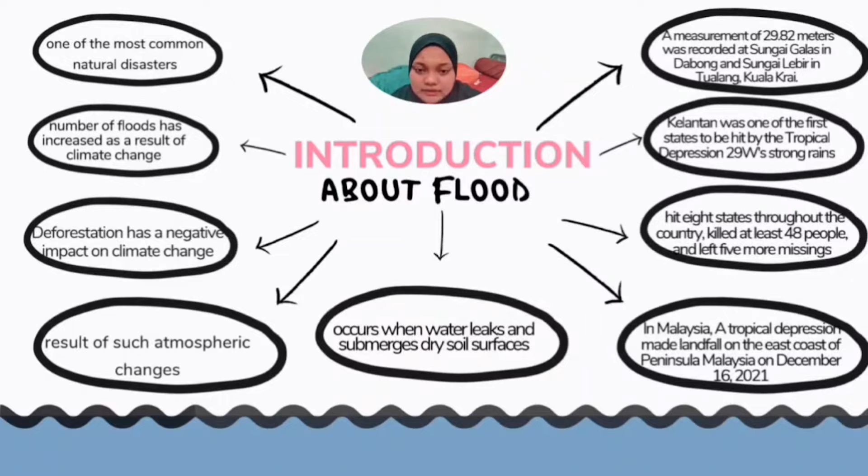Later that day, the number of displaced casualties reached 2,632, but have progressively decreased since then. The number dropped to slightly under 1,000 individuals the next week, and by December 24th, there were 974 people in 5 separate shelters.

The east coast of Malaysia, including Kelantan, Terengganu, and Pahang, has been hit the hardest, based on the Galas and Lebir Rivers in Kelantan, which is one of the places that has been hit the hardest because of their overflowing rivers. This happens when there is more water upstream than usual, and as it flows downstream to the adjacent low-lying areas, there is a burst and water gets into the land. Thus, areas near rivers are at risk from floods.

Other than that, there is a monsoon wind every year from October to March. The monsoon has an effect on the clouds, causing them to form faster and heavier. Therefore, the amount of rain that falls each year keeps increasing because of global warming and climate change. Atmospheric situations might also lead to heavy rain. All of the following will cause rainwater levels to rise, causing overflows in rivers, streams, and drainage systems. That's all for me. Thank you.

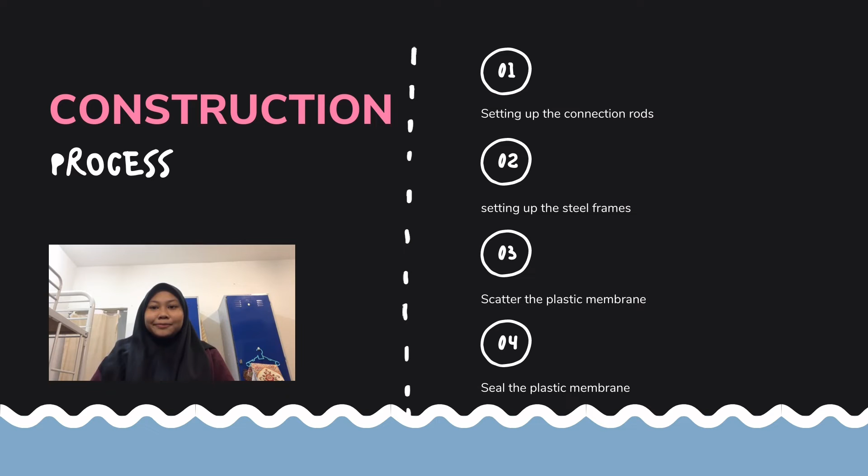My name is Nusra Kana and I'm going to continue on the materials and also the technology used in this project. The material used in this project, first, is the support: a foldable galvanized steel frame that supports the barrier at a 45-degree angle. It takes up the most important barrier rods and provides attachment points for the connecting rods and also aluminium or wooden panels or pallets.

Number 2 is the connection rods. The connection rods provide spacing and stability of the barrier. They allow easy assembly and structural strength, and are used to assemble corner elements.

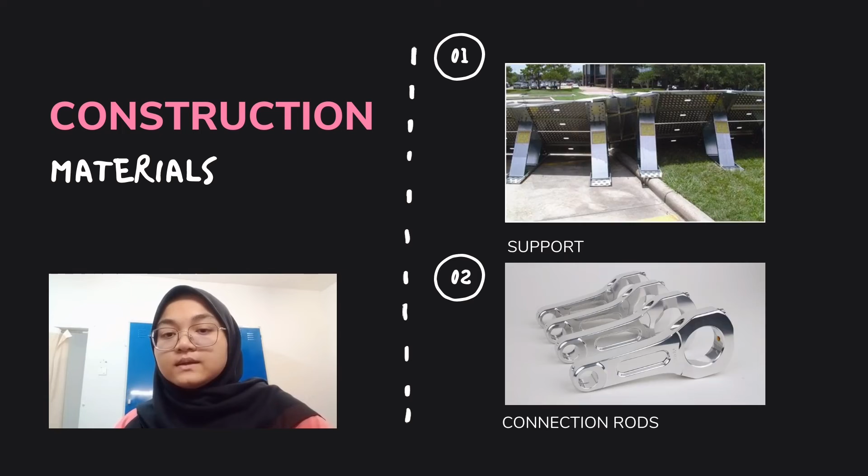Number 3 is the barrier surface materials, such as aluminum sheets, waterproof plywood sheets, or wooden pallets, used as the supporting barrier surface, providing stability and strength to the barrier.

Number 4 is the alu-locks. The alu-locks secure the sheets of aluminium or plywood to the front face of the barrier, and are quick to install and also to remove.

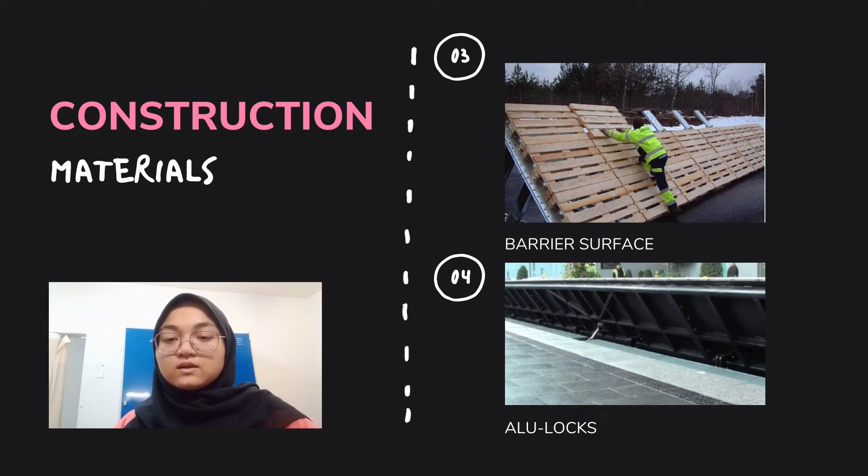Number 5 is the plastic membrane. The plastic membrane is secured to the front of the barrier and out from the barrier along the ground, as it is made from reinforced polypropylene.

Number 6 is the sealer clip. It is used to secure the plastic membrane to the top of the barrier.

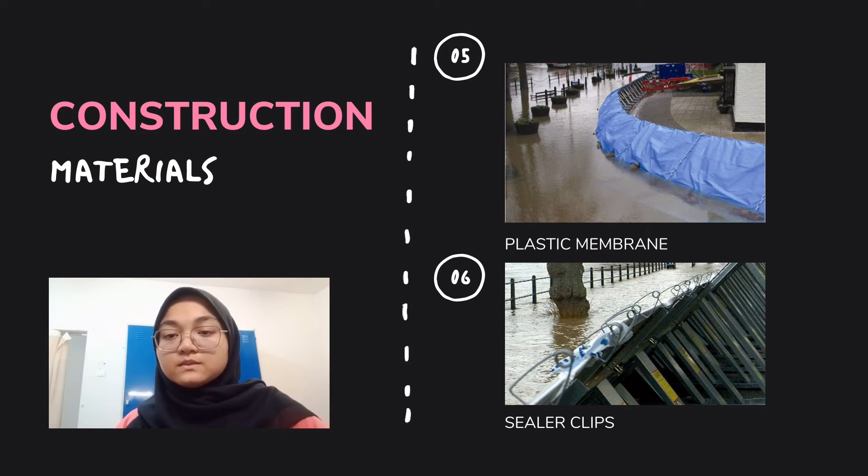Number 7 is the chain with the carabiner. The chain with carabiner provides initial weight to the membrane until the water arrives.

Number 8 is the wing-shield. The wing-shield is a design barrier corner element that allows multiple angle configurations, and it hooks over the special extendable connection rods.

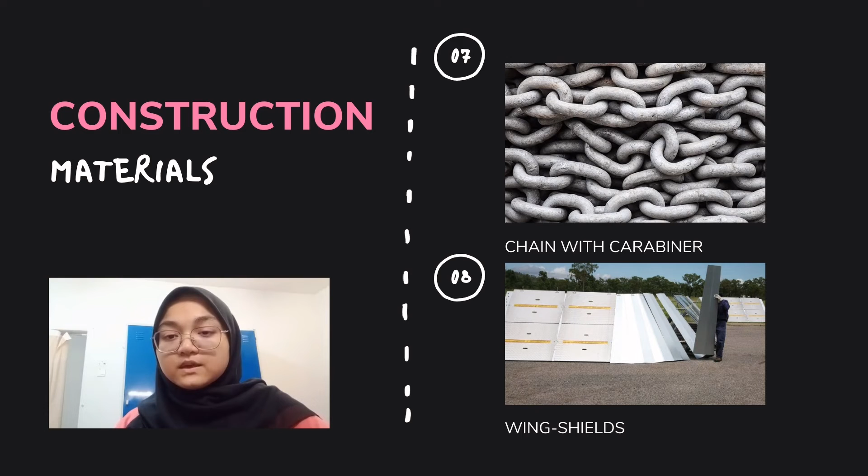Number 9 is the extension, which is capable of extending the Geodesign barrier from 1.25 meters to 1.8 meters, and additional sheets of plastic membrane are added to complete the additional height.

Number 10 is the wall connection. The wall connection is secured to an existing wall surface, as it allows the plastic membrane to be secured to the wall to improve the sealing of the barrier.

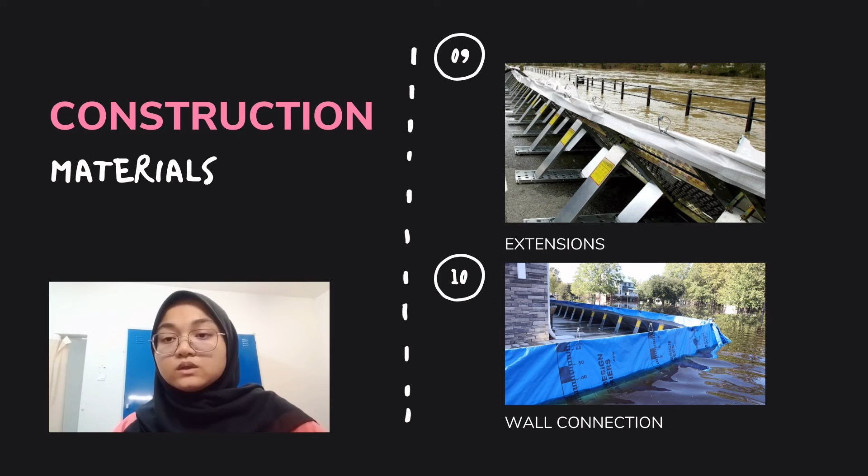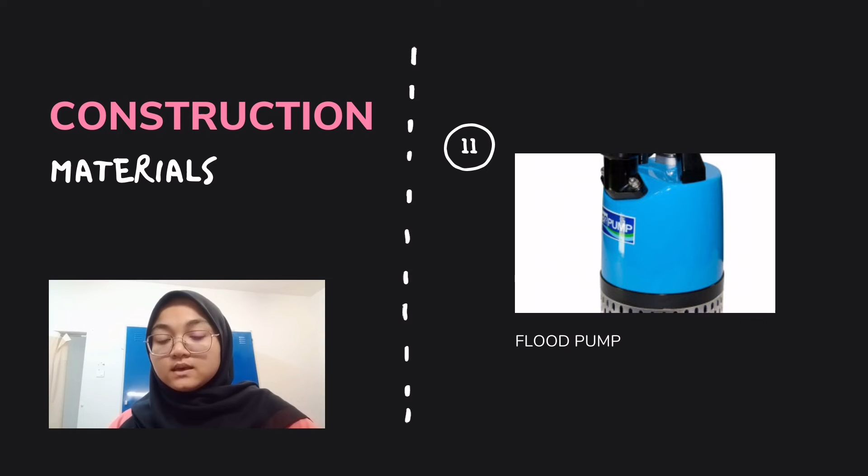Last but not least, number 11 is the flood pump. The flood pump is used to cope with the flood water, as it can pump 3,000 liters per minute.

Next, for the technology, we use two technologies: crane and drill. The crane is used for lifting heavy loads that are beyond human ability, and it is focused on heavy construction work and heavy lifting tasks.

The crane can also move heavy loads and transport them to other places. In this barrier project, cranes can help in manufacturing and assembling heavy equipment.

Number two is the drill. The drill is a tool used for making round holes or fastening bolts. In this project, we use the drill to fasten the bolts on the barrier. The drill has a hand-operated type and also a machine type.

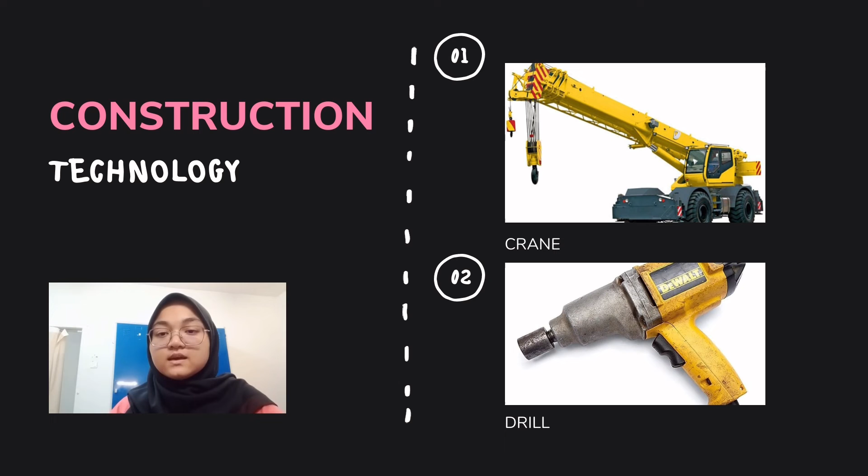Bolts and nuts are used to connect between the galvanized steel frames and the steel connection rods.

For the method, the first step is discussion with other members to share ideas, to divide the task for each group member, and to find the area affected by flood.

Second step is to make the final decision. Geodesign barriers were selected, and Kuala Krai, Kelantan is the area selected for this project.

Third step is to find related information: to calculate the area of the project site affected by the flood, identify the materials to use, and find technology that needs to be rented and used at the project site.

The fourth step is to visit the project site, make sure the area calculated is correct, identify the type of geodesign barrier suitable for the project site, and ensure that the required transportation can enter the project site.

The fifth step is construction work commences: delivering other required materials to the project site. The installation of the geodesign barrier is done on the riverbank.

Cranes are used to erect the geodesign barrier as high as 8 meters. The last step is inspection.

Checking whether the geodesign barrier works well and is safe for villagers, and ensuring that the geodesign barriers do not interfere with the daily routine of villagers.

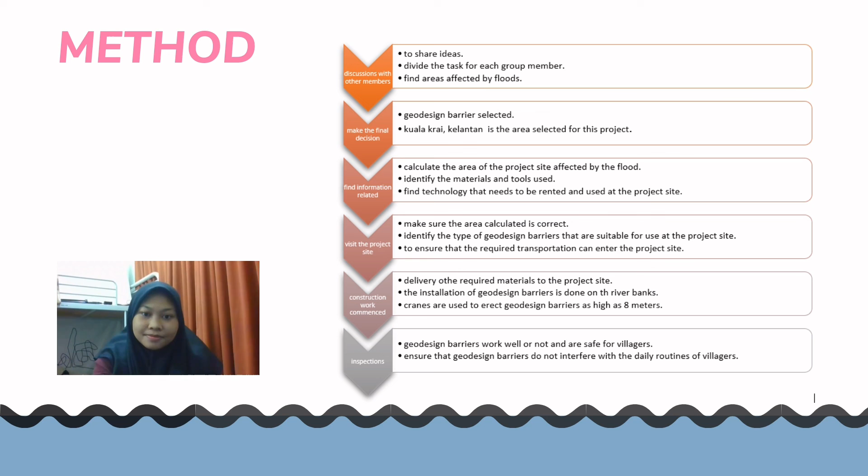For conclusion, floods are caused by many factors such as heavy rainfall, unusual high tides, or failure of dams or other structures that contain water. Heavy flooding usually leads to landslides and easily damages properties. Flooding can give long-term trauma to victims.

Because of this, the barrier that will be installed needs to use suitable and high-quality material to ensure a strong barrier able to withstand water pressure. The more important detail needed is the process of installing the barrier. Furthermore, flooding can be prevented if the soil is more fertile and can absorb more water from the flood.